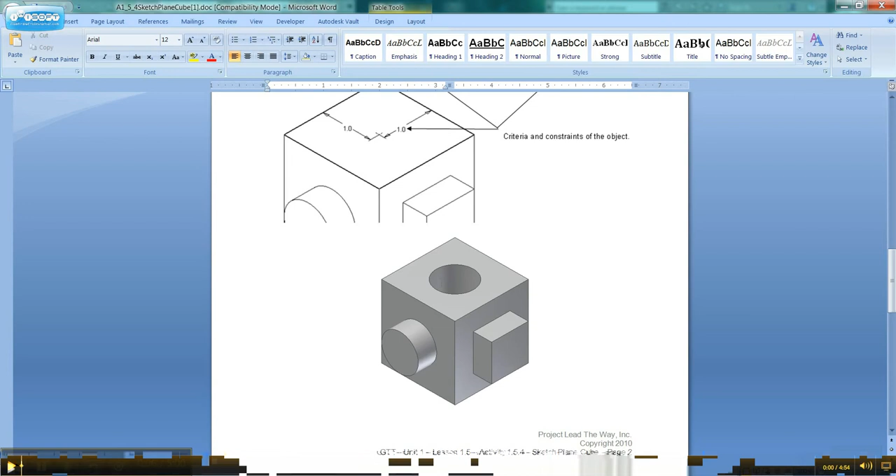So there are a couple different ways you can do this. You can actually use the extrude function and cut extrude, which basically is just doing the opposite of extruding. And an extrusion is to thrust outward or to pull a part out of the object. You can also do the opposite of that by using negative numbers and push into the object. We're not going to use that function for this.

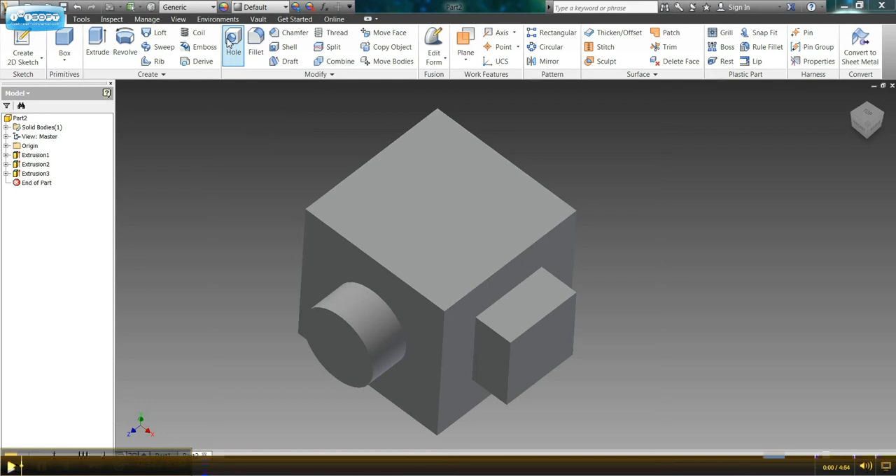In order to create our hole, we're just going to use the hole function. So what we'll do is select our top view, and then in the ribbon we'll select hole. Whenever you make a hole, it's going to open up this other box which has a bunch of different options for creating many different holes.

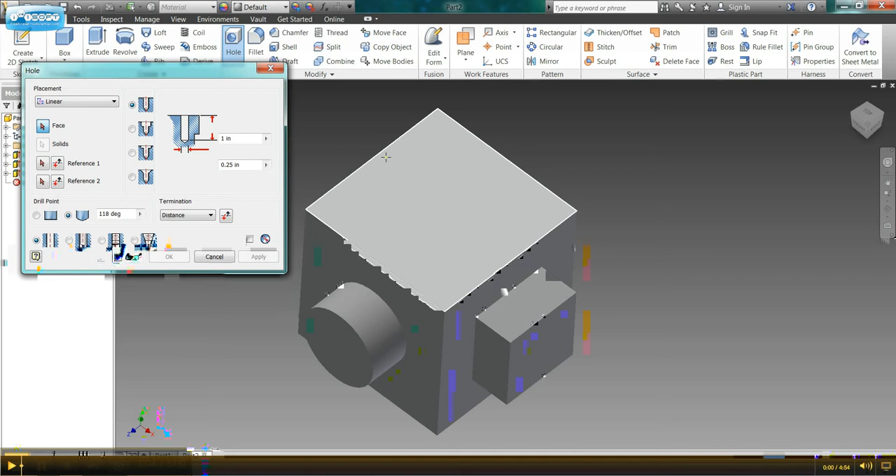So what we'll be doing is creating a linear hole. There are multiple types of holes you can create. We'll be creating a linear hole for this project, and reference point 1 and 2 is going to help us center the hole right in the middle of the top of our cube.

So just a few things we want to fix about our hole before we even make it, and that's going to be the dimensions. We do not want our hole to go 1 inch into the cube. The depth, rather, should be ½ inch, so we'll take out that 1 inch and put 0.5 or 1/2. So we now have a depth of ½ inch into the cube.

And our diameter, we know, is not a 1/4 inch, it is 1 full inch. So we'll take out that 0.25 and place in 1 inch. So now my dimensions are ready to go, and I can start putting in my hole.

The options for putting in a hole, you have a drill point option where you can have the bottom of the hole angled or the bottom of the hole flat. We're going to choose flat for this project. And once I have everything ready to go, it looks like our hole's ready to be placed.

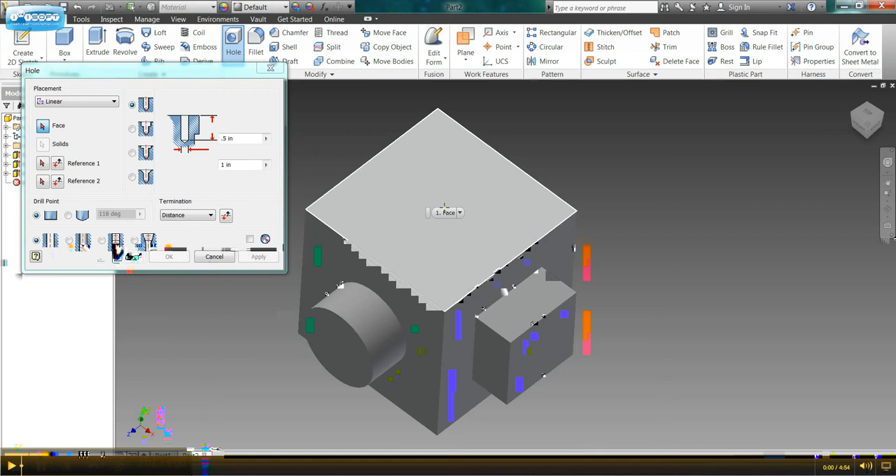So we come over top of the surface in which we want our hole on, and we're just going to click, and that's going to open up our hole placement. This box here indicates my diameter, which is 1 inch. If I decided I want that hole to be 1.5 inches, I can change that right here in the box.

Or let's say I wanted it to be 1/4 inch, I could make that change there. But we know, and we've already put in, that we want our diameter to be 1 inch. So we'll stick with 1 inch. Okay. So now I need to ensure that my hole is centered on the face of this cube.

So we're going to come over here and click reference point 1, and this is sort of just like the dimensioning we did with our cube and our square and circle in the last video. This is telling me that the center of the circle is 0.92 inches from the side of the cube. Well, that's not what I need. I need it to be exactly 1 inch from the side of the cube.

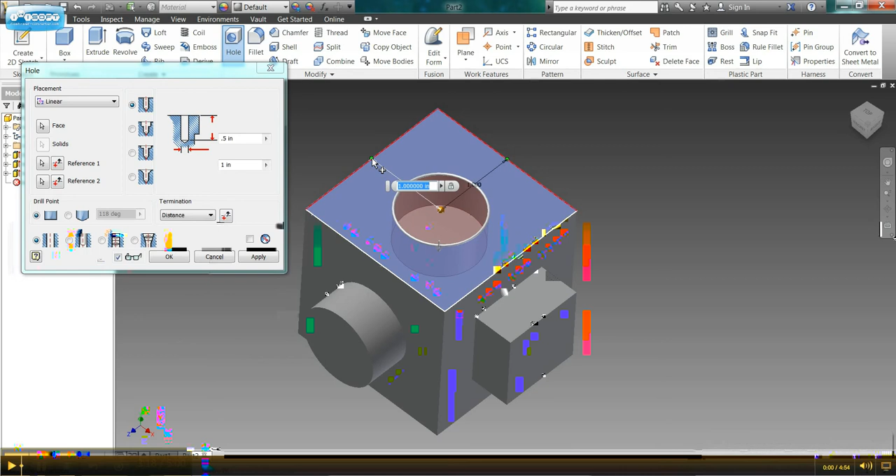And then I'll need to select reference 2 and select the opposite side of the cube, which is now also 1 inch. So I'm ready. I can click apply, and I have my hole, and then I'll exit out. So now I've got my 3D cube all set and ready to go. It's ready to be put into a drawing file and dimensioned.

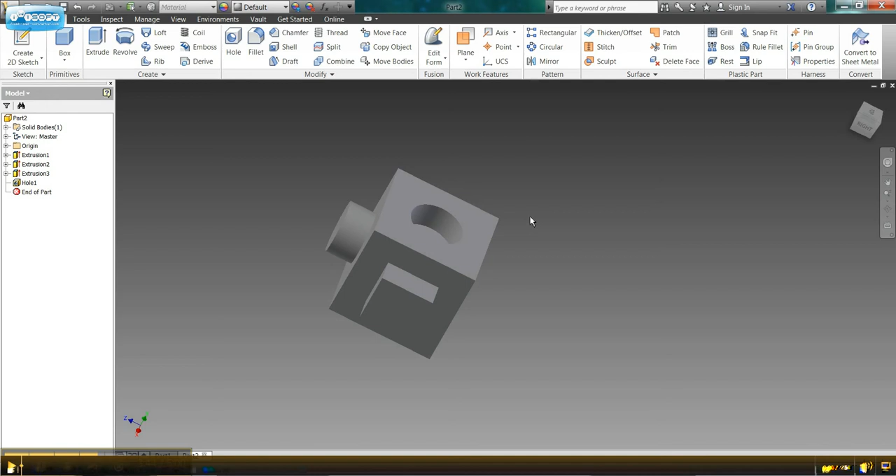There are a couple of other functions I'd like to show you while we're here that you can use as you are creating new objects. So let's say that I wanted to screw something into this hole. Well, I could make a thread here so that a screw would fit into it. I'm just going to go up and select thread, and then select where I want to put the thread. Okay, that's going to just directly apply a thread so that it's ready to have a screw threaded into the top.

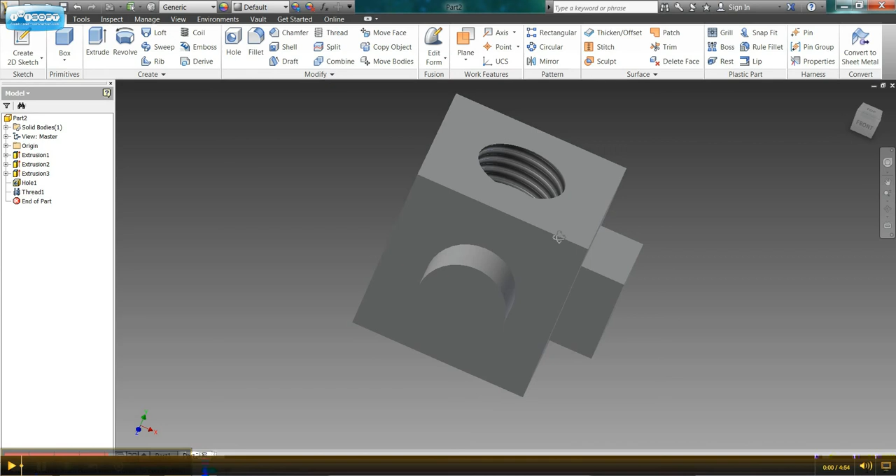Okay, let's say that I no longer wanted my square sides, and I'd rather have this be angled, or what we call beveled, for each section. Well, I can use the fillet or chamfer options here to sort of flatten off or angle those sides. We'll use chamfer for today.

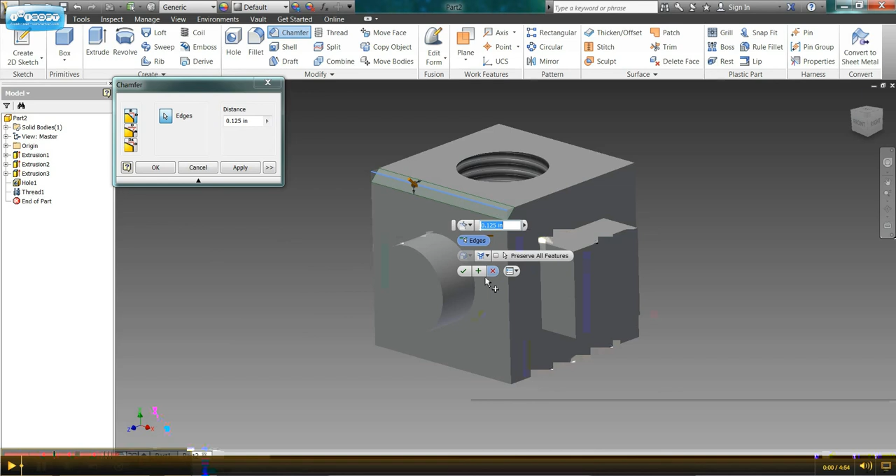So I click the chamfer option, and it's going to allow me to select the sides that I would like to bevel out. So I can just come around and select each side, click select, and I've beveled off the top of my cube. So feel free to play with each of these functions, and I'll see you in the next video.